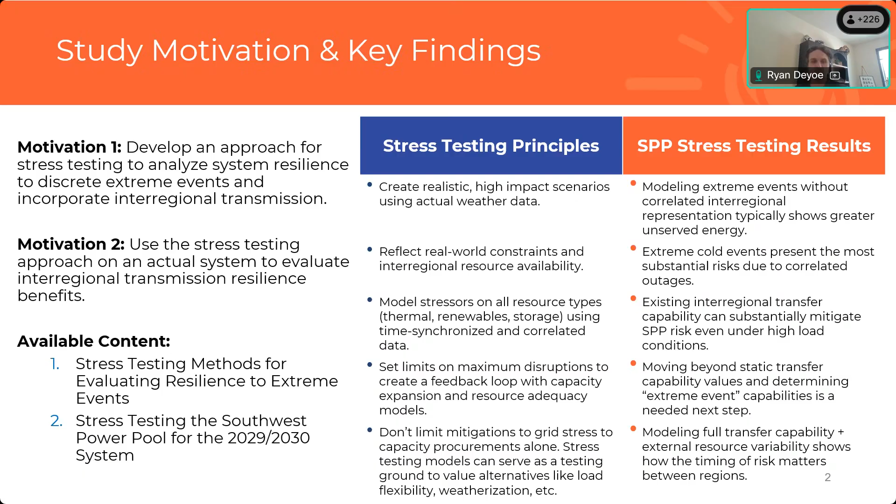So I talked a lot about principles, and we got a really wordy title here, but it's meant so you can look back on this and read through and follow along if you don't have this webinar in front of you. So we thought about really 4 steps when it comes to stress testing and the process surrounding it.

Really, step 1 is you're developing extreme events. I mentioned before, but we think that these extreme events, these scenarios, should be grounded in plausible multi-weather year sets of data. So we want to maintain weather correlation to maintain credibility. And I also think we should be open to using future climate change scenarios. There's some great data sets that have come out that try and produce the hourly granular resolution for geography and time on different weather conditions over climate change scenarios. So be open to that, expanding our toolbox.

We should define these events clearly. If we have the data available, if we're recreating a historical event, or if we're taking different factors that have happened in the past or maybe could happen in the future, try and define where it lands in terms of risk level. How severe is the event that we're trying to simulate? And be transparent about that and why you're testing it.

Step 2, model the interconnected grid. This one kind of speaks to James's point as well, where we should try and reflect the real world capabilities and constraints, economics, and interdependencies as much as possible. That's a fundamental pillar that we'll be talking about with our study, really how we decided to evaluate things for this case study.

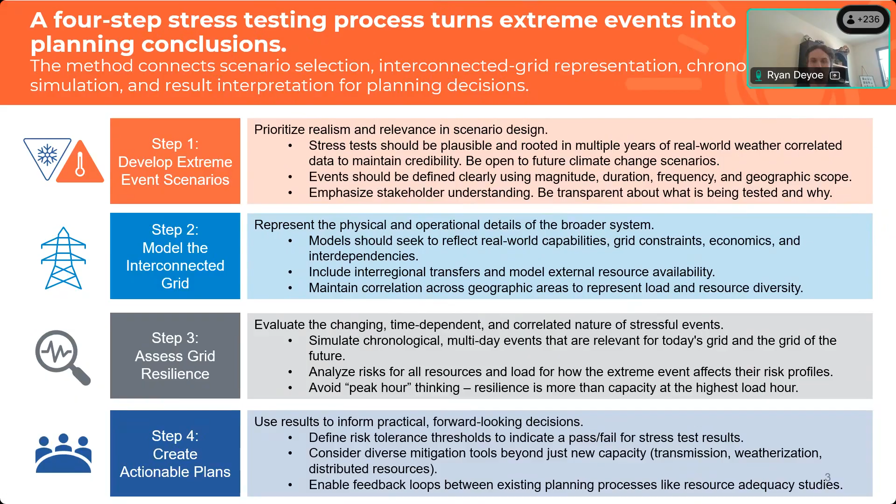So taking us through the wide area multi-day screening approach that we used. More details are going to be found in the report, just because we have limited time, and we took in a lot of both power system data and weather data and temperature data in particular, and we brought those together so that way we could develop a list of extreme weather and renewable risk events. We categorized them using statistical methods developed from, I believe it was Pacific Northwest National Lab, around energy droughts.

We could bring those together and add a couple other variables and screen for region-wide and continent-wide weather events. We wanted to do this so that way we could have consistent weather correlated data across a large scale. So the continental United States is the region that we were looking at, including SPP in detail. When you're doing these types of screening events, we should try and have as long of history as possible and be able to understand what tail risks might look like, so we can develop scenarios that are robust in regard to those. And like I mentioned, they should span at least hours and multiple days.

I think there's a really good opportunity for stress testing, resilience planning in general, to connect with NERC TPL-008 around extreme heat and cold weather events. This type of method is more akin to a resource adequacy, so folks familiar with that certainly would be familiar with some of the methods used here. But I would say that in transmission planning, there could be opportunity for improvement and having those types of analyses talk to each other.

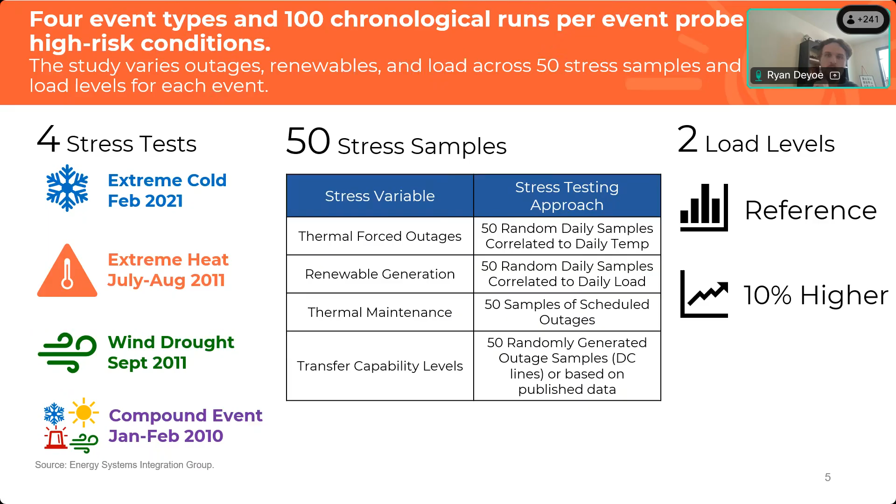Now, the modeling framework that we used to accomplish this, as we mentioned, interregional transmission was really one of the focuses around our case study. And we took a hybrid model. We took a detailed sub-regional SPP model where we're modeling generators at a unit level in each of these 6 sub-regions, 1 through 6 here.

And we layer in here transfer capabilities from the NERC ITCS work, as well as from SPP LOLE study transfer capabilities. So each of these sub-regions has a capability into their subzone, which is SPP North and South. And then between SPP North and South, we have transfer capabilities both between those regions, marked by the yellow lines between the northern and southern regions on the map, as well as to external regions using similar topology to the ITCS. And then we model DC interfaces as well. Those are the blue lines.

So we're trying to get granularity internal to SPP because that's our region of focus. Thinking from a planner perspective, we want to have as much detail as we can internally, and we want to adequately represent the external regions, which brings us to this second part of this formula here, where building on previous ESIG work, we took the hourly energy margin approach that we developed a couple years back, where we're taking the weather correlated data sets for all of these other regions in gray, and we're stacking up their variables together and accounting for their weather dependent outages, storage net generation, what their load is on a future system, all taking this out to about the 2030 timeframe.

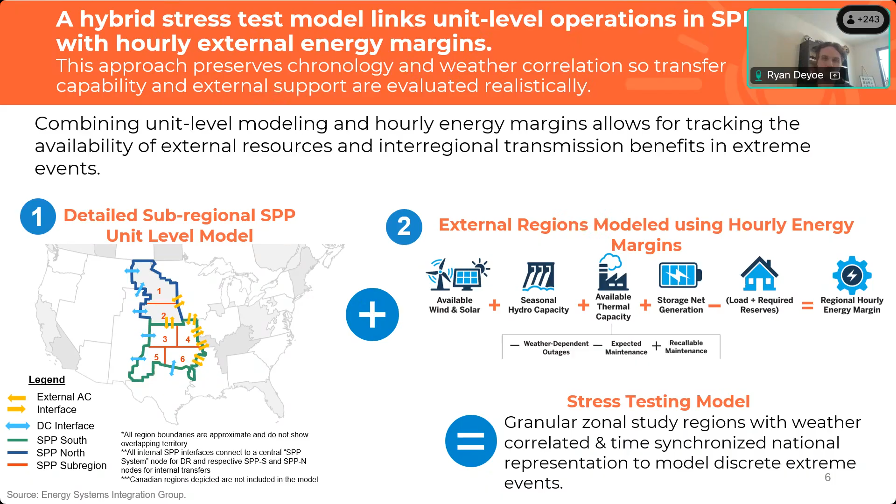Taking us through our actual study where we wanted to isolate the value of interregional transmission during those stress testing events, we modeled SPP in 3 representations: an island, which is no imports, just internal; firm net import generators only. We modeled the level of availability based on SPP's LOLE model, where they have a certain megawatt value for net imports into each of the subregions.

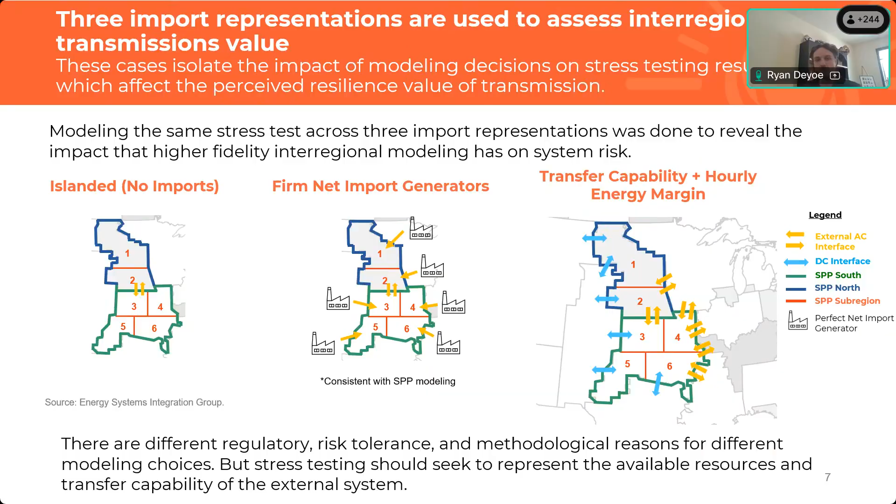And then we took our full model approach, where we modeled the capabilities and the resource availability. So there are different reasons that you might take these approaches, and we really wanted to isolate how stress testing results look when you take these different approaches. All right, gonna get into some of our results.

Our extreme cold event is coming up first. Like I mentioned, this event is very much a resimulation of Winter Storm Uri. So these are our baseline weather variables. We've got significant load levels, very high winter load in this future system, over 50 gigawatts, pretty high net load where renewables are low and temperatures are very low. So that has a high forced outage risk.

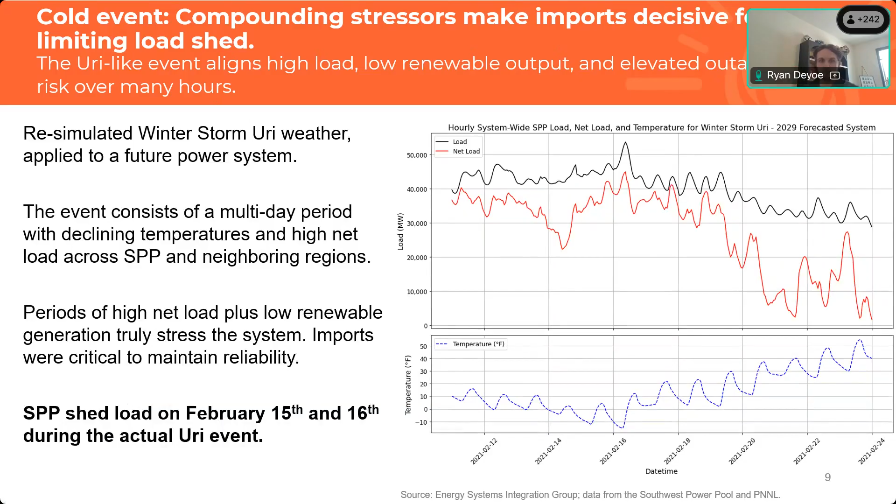When we take our interregional transmission full modeling topology, we take all 50 of these unique samples across our 2 load levels, where we have the projected load and then the plus 10%. We modeled the entire continental United States, and we took note of periods where we had low energy availability within SPP, and we wanted to isolate and look at what were the imports in that period.

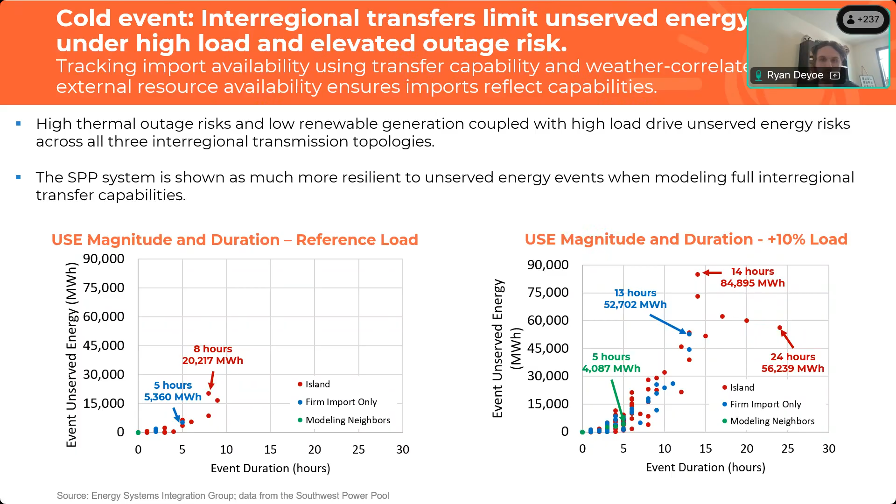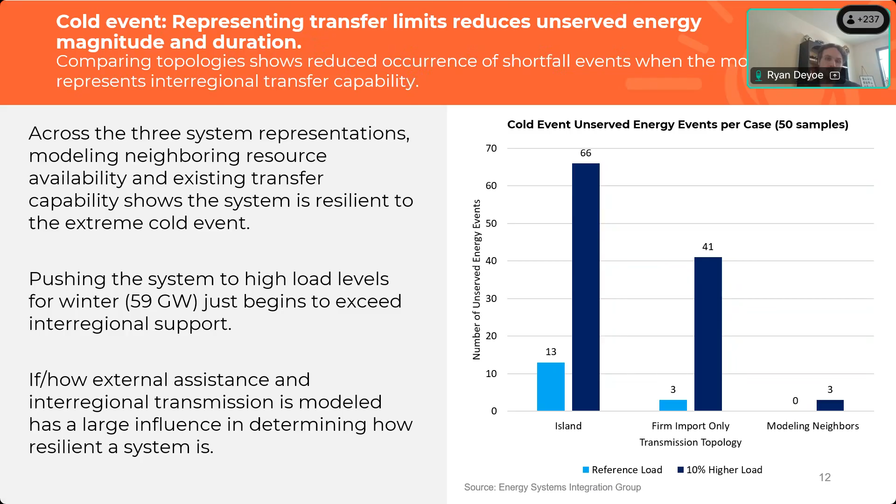Putting it another way, how we model external assistance and interregional transmission has a large influence in determining how resilient a system is. This is the total count of unserved energy events in this winter event. The light blue bars are for the reference load, and the dark blue bars are for the 10% higher load case. Out of 50 samples, there's 13 events in the island reference load, but in the plus 10% case, there's 66 unique events. There's a pretty big difference between the three different topologies, and we wanted to highlight that with this method we can track the benefits of interregional transmission in a pretty complicated planning model setting.

Moving us through so we can have some time for questions. I've got the extreme heat event, a similar layout here for you to look back on if you so choose, just to give you some details around the type of event we're modeling. So we're modeling a slightly longer period here. This is July 27th through August 4th, 2011 weather shown here.

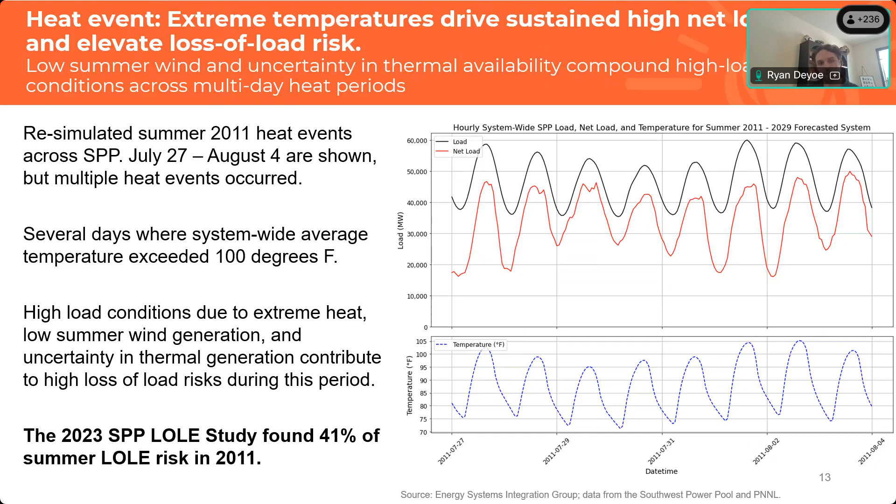We model a slightly longer period than that to get some more of the risk dynamics around the high temperatures that occurred in that summer. So high net load periods as well. A lot more periods of low margin or high risk that are showing up here as SPP in this example.

So when we look at this unserved energy chart again, we see in our reference load no risk in this future scenario based on the 50 samples that we modeled. But we do see in the higher load case quite a lot more events occurring, which points to that even though in the reference load things looked okay, we're really on the edge, right? There's not much that could go wrong without having things be a whole lot tighter.

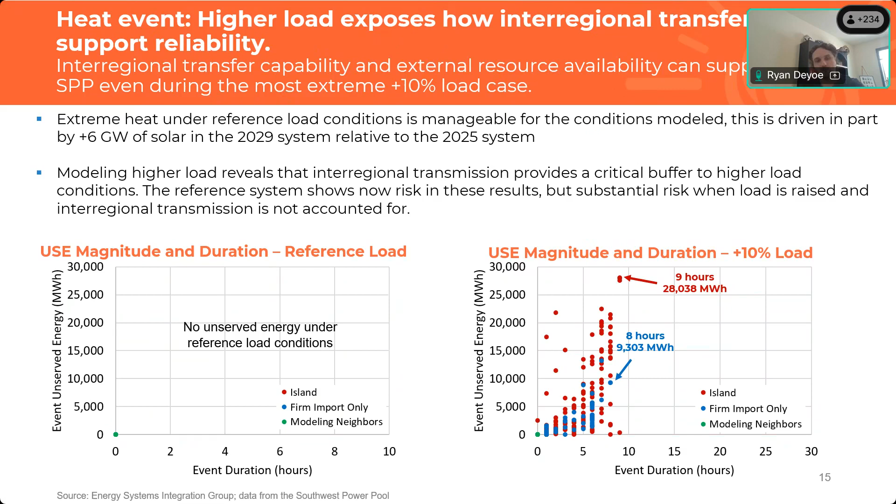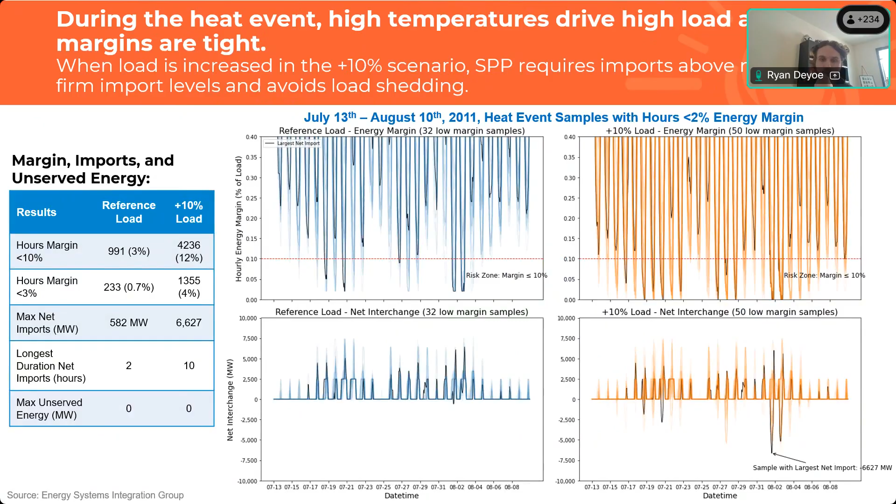And that's where you see the difference between these modeling scenarios around transfer capability. So when you have firm import only and island representation, you're really discounting this value you have of interregional transmission. If I go back a slide, we weren't having as deep of imports, about 6,600 megawatts, whereas we were looking at 8 gigs or 8,200 megawatts in the winter event. And it's occurring relatively infrequently. But here we can see the difference in our unserved energy events for this summer event.

So when we think about resource adequacy analyses and the assumptions we make there, different events might have a different risk profile based on how we're modeling interregional transmission, how we're modeling external resources, and tracking their availability in detail really does change how the event looks in terms of its extreme event.

Now, this summer event had less outages than the extreme cold event. There's a higher degree of uncertainty and a higher magnitude of risk around high thermal forced outages in the winter, but there's low wind availability in the summer typically. So different types of risk for different events.

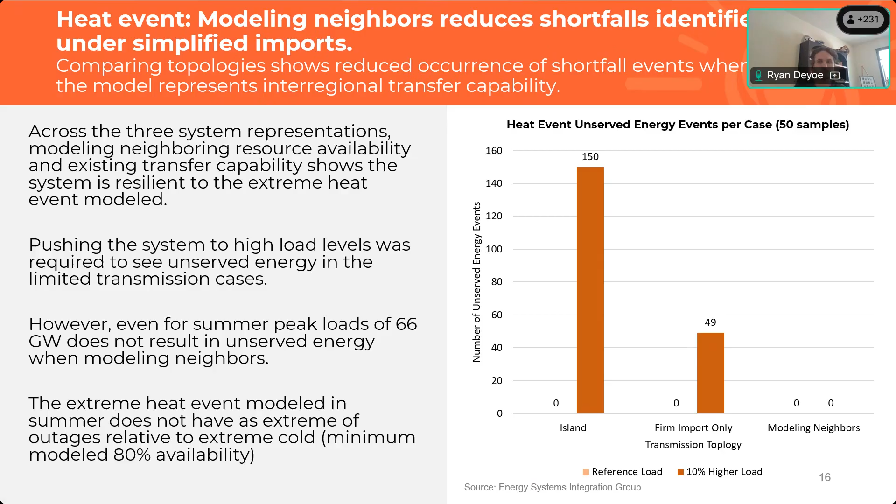Moving on to our wind drought event. Again, a similar setup for these slides where I'm showing you the hourly load, the hourly net load, and then the temperature in this initial setup. Really want to highlight here that there are periods where load is decently high in the case. You can definitely see that in that September later part in the chart, like getting up above 50 gigawatts. Again, it's a future SPP system.

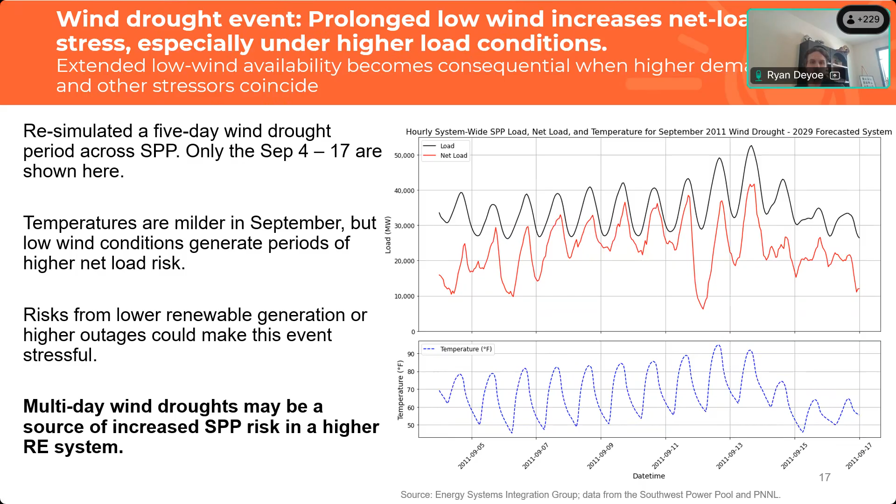So we can see here that in our reference load case, not a whole lot of risk when it comes to this wind drought period. Now, when we think about the system that SPP has in the 2030 timeframe, there's still a substantial amount of thermal generation in that system, and that might not change.

But if it does change, this type of wind drought event could become more severe. That's why I think it's important. We looked at one snapshot, but you could extend this method to looking at future snapshots of resource mix years and be able to evaluate: does that stress event look as stressful as it did in the past with my changed resource mix? That's why we think having a selection of events is valuable, and maybe maintaining those events throughout different study years is also a beneficial approach.

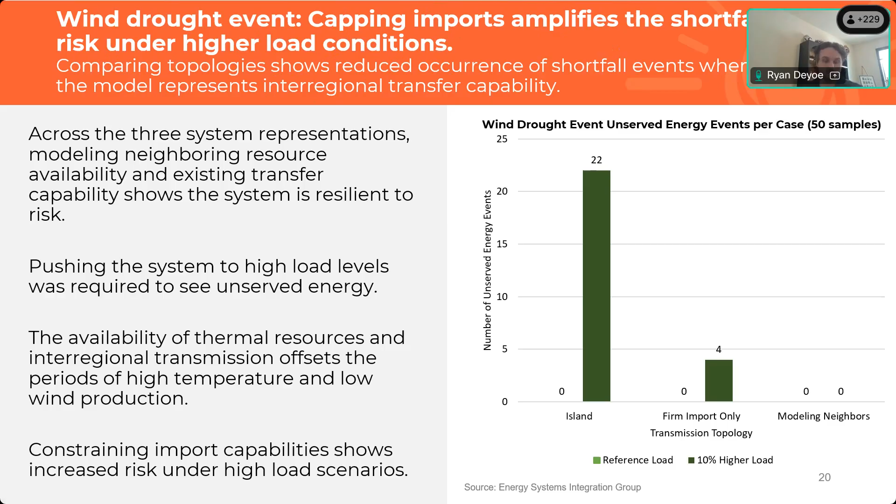It might be obvious. But it also has to do with the type of resource mix that we're modeling. So, like I mentioned, still plenty of thermal capacity, plenty of dispatchable capacity, not a whole lot of battery storage on the system in this projected future. But when we add in modeling transfer capabilities in a higher level of detail, we see that the system's resilient to this event. So, like I mentioned, a summary of how interregional transmission supports SPP in stress tests, specifically in the ones that we modeled.

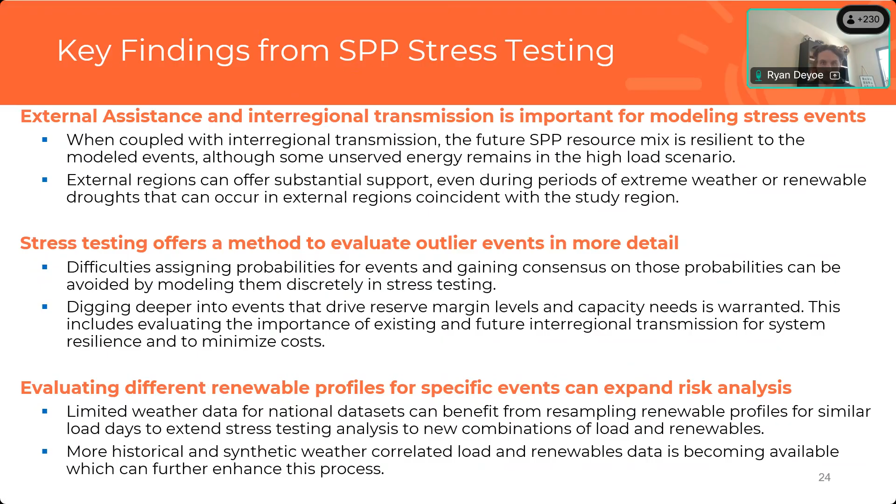Lastly, future stress testing work. As with all things, more could be done. So we think modeling of external assistance and interregional transfer capabilities could be improved. More power flow modeling in general, I believe, is needed when it comes to what is the transfer capability under a variety of system conditions. So the NERC ITCS set a great foundation for your typical winter and summer peaks, but there are other types of events where you might have different transfer capabilities or different types of risks, particularly when we think about generator outages. How do those change our transfer capabilities, and can we get those in these types of models?

Reflecting firm contracts also would be beneficial, and having a little bit more detail on the transmission topology with a nodal or some sort of hybrid nodal detail, maybe within SPP and maybe within the nearest neighbors might be beneficial, even though that would also increase the workload.

As to how you develop the events, we looked at temperature and wind and some compound factors here, but there's other types of extreme events that we didn't really factor, and you might find valuable depending on the risk profile of your region. That's wind chill, precipitation, gas production declines, which would be connected to the former. Tornadoes, though, hurricanes, wildfires, right? We didn't assess those, but those would be valuable in the stress testing framework. And leveraging synthetic data or climate change data, I think is something we wish we could have done and something we would look forward to doing.

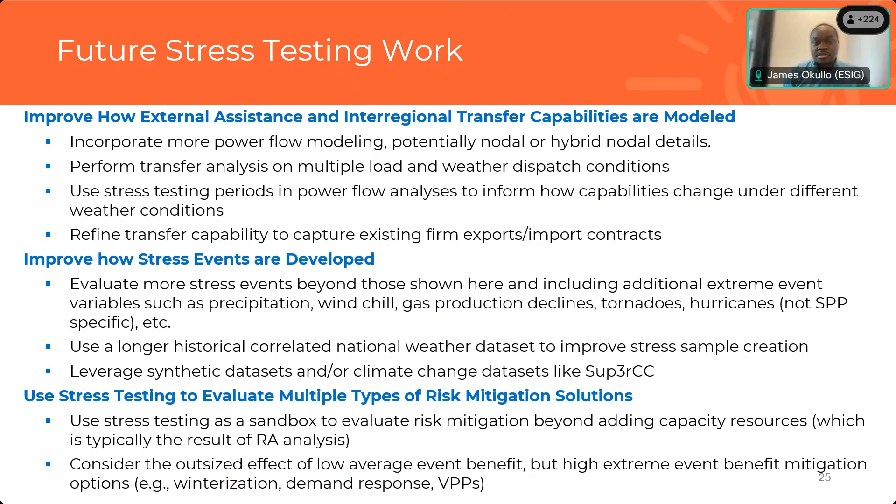So Ryan, going straight off of some of the recommendations that you have, right? If you think about the actual events that we've experienced, the last couple of weeks or the last couple of years, and some of the best practices you describe in the report from different regions. If a region could change one thing this year to improve stress testing, what would that highest value step be? Is it the fidelity of the modeling, both in the transmission and the generation? Is it looking at the weather and the diversity of weather conditions? Is it being creative in what the stress periods are? Or is it actually doing some stress testing, because we realize that not many people do stress testing? Sorry to seed the question there, but if a region could change one thing this year, what would be the highest value thing?

It's a good question. I will actually give two answers, even though it's just the one thing. So the first is model interregional transfer capabilities. I know planning regions and utilities can do these studies and they have done them. Some regions are a little bit ahead of the curve. Model the actual transfer capability, but also model the variability in the resources in a weather correlated, time synchronized fashion. One thing I really like that we did in our study, it's challenging, is trying to create weather-informed renewable profiles that vary within our stress test as well.

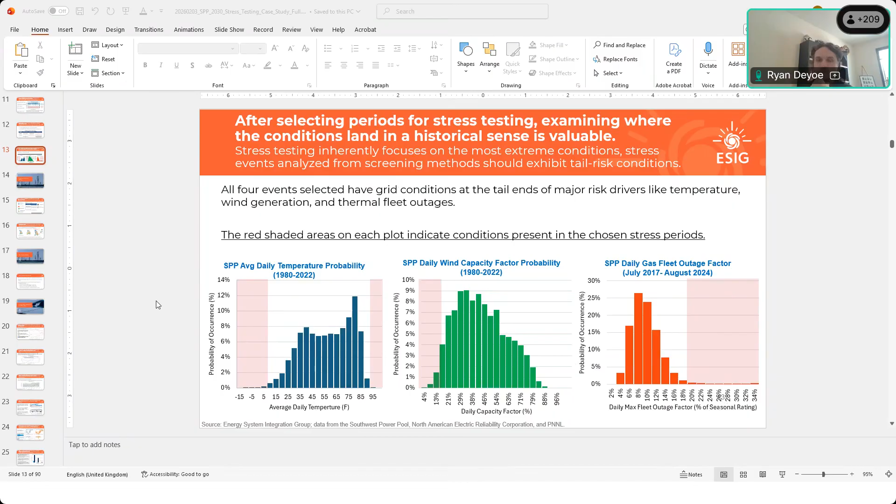Thanks, Ryan. So going to the question about the tool. So there's a couple different components in this modeling and analysis, right? Looking at the transfer capability themselves, and then looking at the chronological weather correlated modeling that you're doing. So what type of tools did you use for the analysis? I'll talk more broadly about type of tools. And then the actual question was, what specific model and tool did you use?

Well, I think you could accomplish this with a lot of tools out there. Really what you need is some foundational weather data sets. So thankfully for us, SPP shared their weather informed power system data set that they use in their resource adequacy models. Although you could create that using any of the available data sources that are out there. We've got historical hourly loads. We've got synthetic weather data from NLR and from the Wind Toolkit, NSRDB.

And then we've got, thankfully, some transfer capability values from the NERC ITCS, which used AC power flow tools. Tara, in particular, is what they use to do transfer capabilities, both region to region and simultaneous import limits. Like I mentioned, it'd be nice to expand the analysis to look at transfer capabilities during stress events that go beyond winter and summer peak load conditions. I think that would be a valuable improvement.